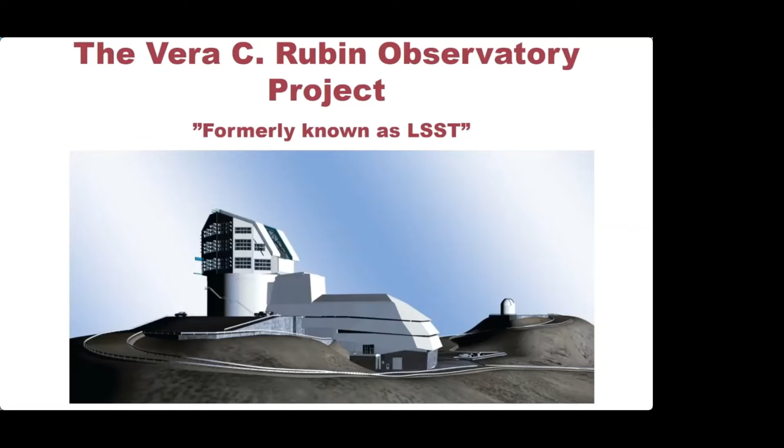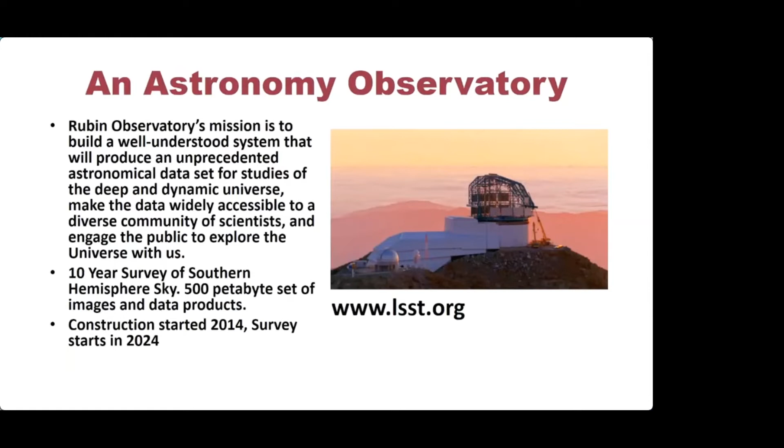We'll start by defining what we call the project, and by that we refer to the full development of the Vera C. Rubin Observatory, previously called the Large Synoptic Survey Telescope. We started just after a compelling question and an idea began to inspire a community of scientists to think about a new observatory, a new system that could address many compelling questions in astrophysics and astronomy. Our mission statement is provided here, but I leave that for you to read later. We began to trade off what was possible, what was desired, dreaming up a system and agreeing on requirements for capability and performance. Basically, we started with a blank mountaintop or blank slate and specified a complete system. We are well on our way to delivering this system, the Rubin Observatory.

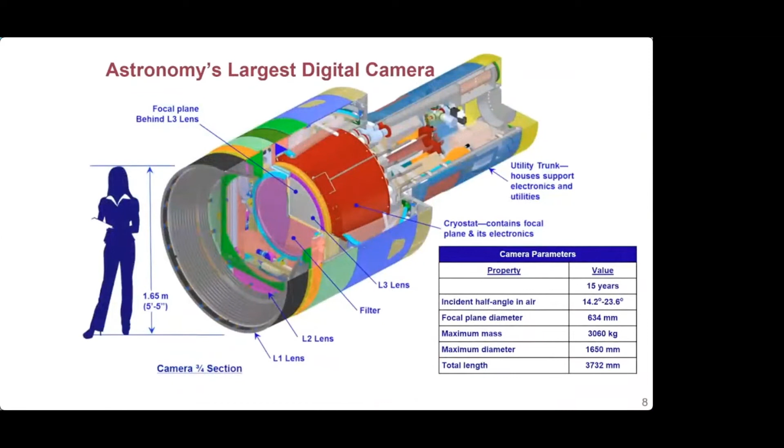This system includes a massive 8-meter class telescope, a support facility on a remote mountaintop, the largest camera ever made for astronomy, weighing in at 3 tons, carrying 5 different filters and having a huge front entrance lens, and featuring a 3.2 gigapixel focal plane at the heart.

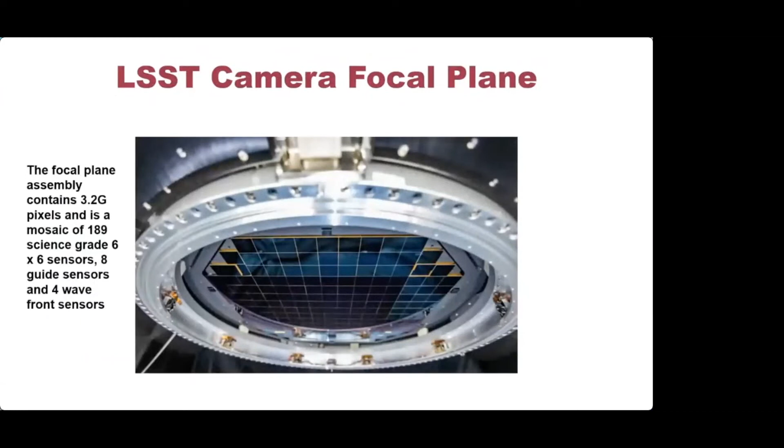Our system also includes a data management system that can take the captured image data from our remote mountaintop in Chile and move it to a data facility where it will be processed, archived, and we can serve those images, alerts, and data products to scientists ready to harvest the database for their specific pursuits.

Finally, the project also includes the development of an education and public outreach system specifically tailored to engage with the global community and share the opportunity for exploration with the public.

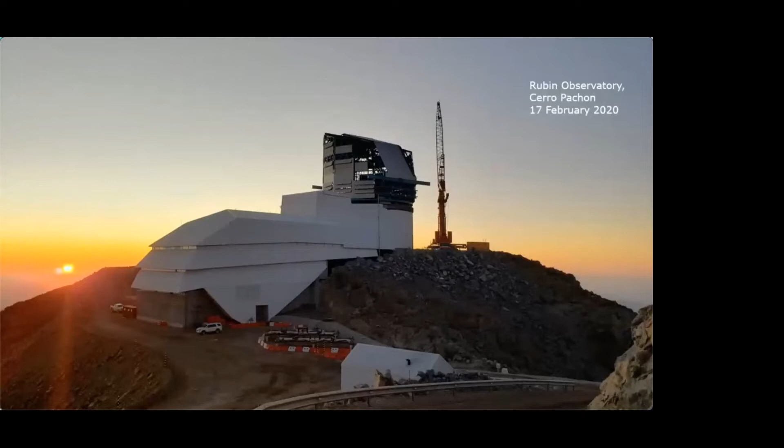You might be thinking we have telescopes already, and even bigger ones planned, and we have some in space that take exquisite data unobstructed by the annoying Earth's atmosphere. But the fact is that ground-based assets are still very viable and far-reaching, and the Rubin Observatory is a world unique in its power and capability.

Designed to take 15-second images of 3.5 degrees of the sky at a time, covering the entire visible sky every few nights, consistently in 6 optical bands, every night for 10 years. The system will alert on anything that changes on minute timescales through image differencing, and will use the 5 million images to produce annual catalogs and a massive 500 petabyte public astronomical database.

So let's look at a few aspects that are key in this project that emphasize a need for formal tooling to support the safe development of the system.

First, it's really about the timescales. The project spent from roughly 2004 to 2014 perfecting the science case and associated designs to establish the project's technical, budget, and schedule details. At every formal review milestone, it was paramount to convey a clear handle on the technical scope, requirements, the programmatic risks, the hazards, and what we had in a plan to execute the project with the highest standard of safety. In 2014, we were authorized to proceed, and we are now well on our way to completing the $750 million project by 2024.

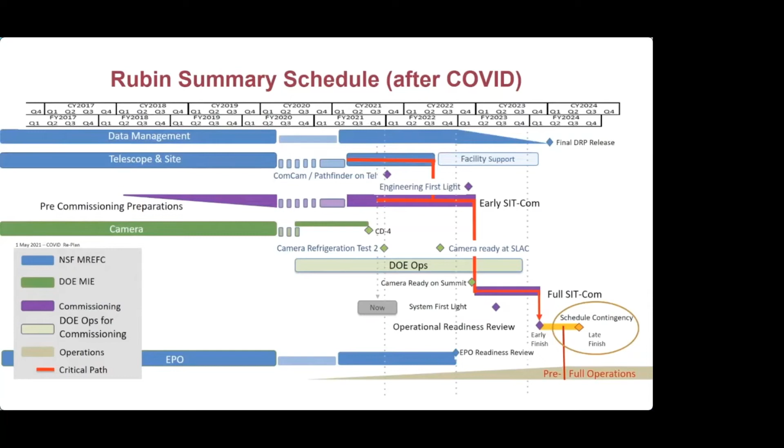Now let's take a real quick look at some of the technical and safety challenges of the project, and this is just a few.

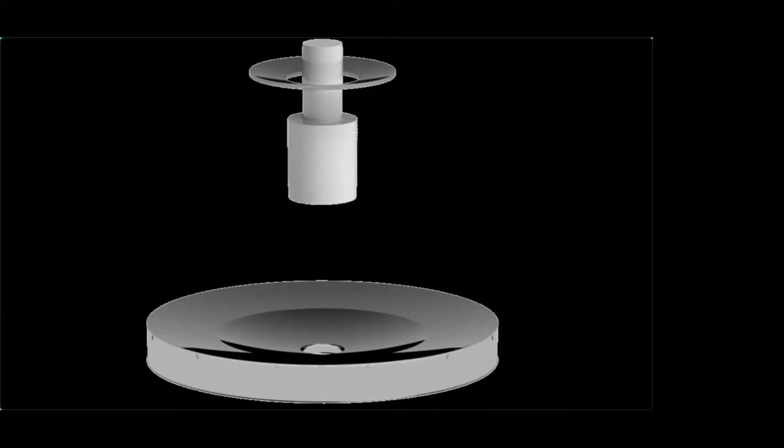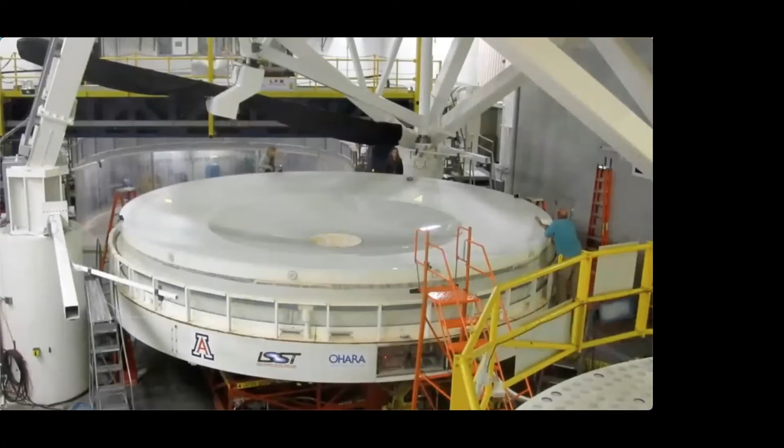The primary and tertiary are fabricated into the same monster piece of glass, shown here at the bottom and shown here again in fabrication. We had to design it for safe operation on the telescope, but we also are responsible for getting it safely from here in Arizona, where it was made, to the mountain in Chile. Many design features are required to handle all of these aspects.

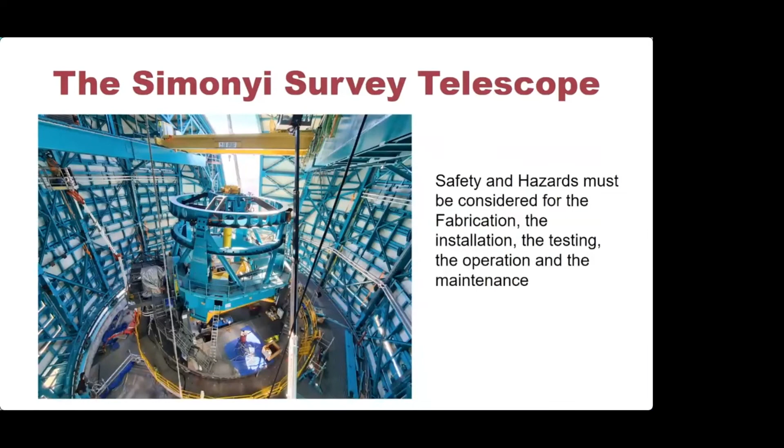The main telescope for the system is a 300-ton telescope mount. This is both the metering structure for the optics and the camera, but also the gimbal responsible for moving the position from position to position on the sky relentlessly. It is massive, fast, and has the capability to cause serious harm in regular operation, in maintenance, and especially now while we are getting the system working.

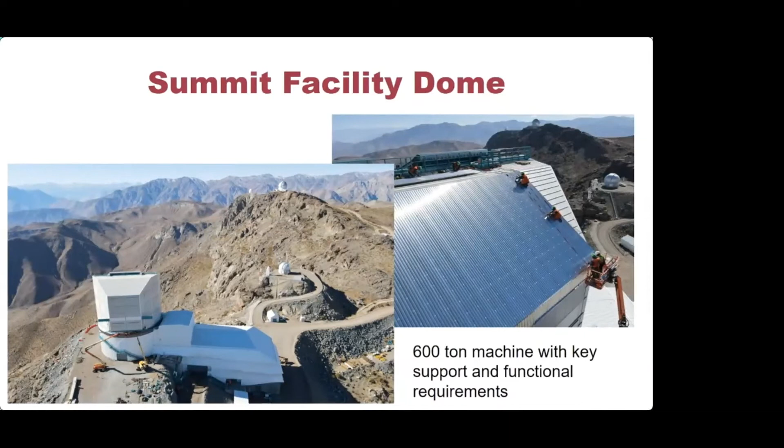The 30,000 square foot building to support the telescope operation, construction, and maintenance on the remote mountaintop is ripe with safety issues and hazards that must be identified early and mitigated early, or there will be limited options later in development and operation. The dome is not just a roof, but a 600-ton machine that rotates, has the main shutter, a moving baffle system to protect unwanted light from entering the shutter opening, has articulating vents for natural air flushing, internal cranes and passageways, ladders, platforms, and a large screen that plays a key role in the constant calibration of the camera and optical system.

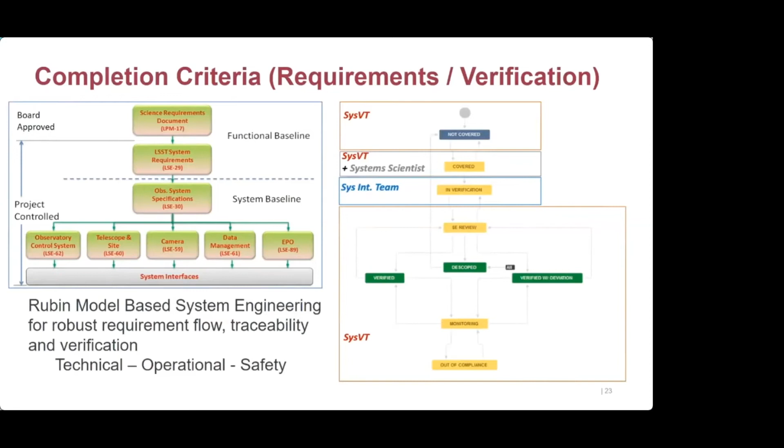I can go on about how robust systems engineering and the safety strategies Chuck will discuss in a moment are key to the success of the project. But let me just point out that projects do not always go according to plan, and all these systems are key to the success of those situations as well.

Finally, the Rubin construction is a complicated enterprise involving several hundred people on the project and several hundred working for contractors that all work together toward a common goal, with the safety of personnel and equipment at the forefront of their activity.

So thanks, Victor. We're going to talk a little bit about safety from this point forward. We planned how we would manage safety in the days of the preliminary design that Victor talked about, and one of the first developments was the hazard analysis process.

Other control measures are not limited to, but these are the major ones: the safety group is part of the senior management team, anyone can stop work if there's a safety concern, and management sets the example for safety performance. Contractors and collaborators are expected to have the same safety systems of control, and we also utilize third-party reviews to help improve our safety performance.

The safety policy recognizes and accepts different safety cultures within the project team, and it also emphasizes that the project has a minimum expectation for all those that work on the project.

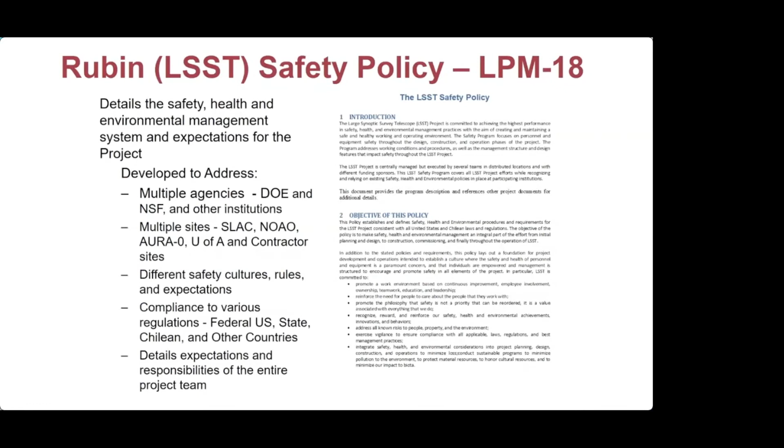The Safety, Health and Environmental Plan is a complicated document, but it's also a compliance document that establishes the minimum expectations for employees, contractors, and collaborators on the construction site. It defines the best practices for things like lockout, tagout, confined space entry, other OSHA requirements, and world-class safety standards.

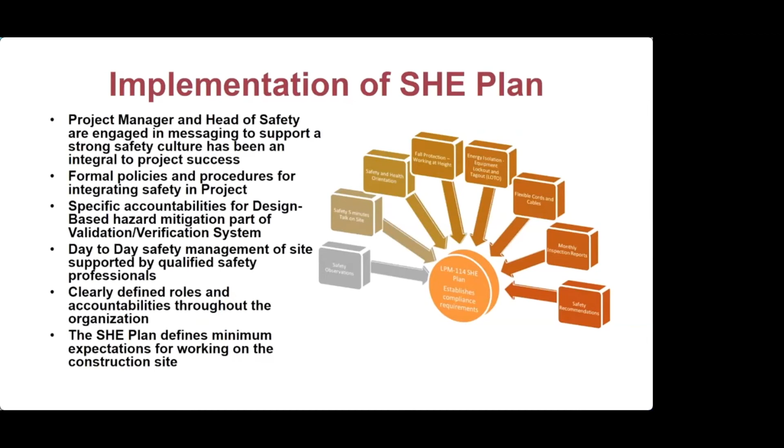This is a complicated project with hazards that needed to be identified and addressed. As a basis for identifying hazards, we used the MIL Standard 882 as our guide. In the early years, we convened engineers from all trades and reviewed preliminary drawings to identify hazards based on our experience of designing and operating telescopes.

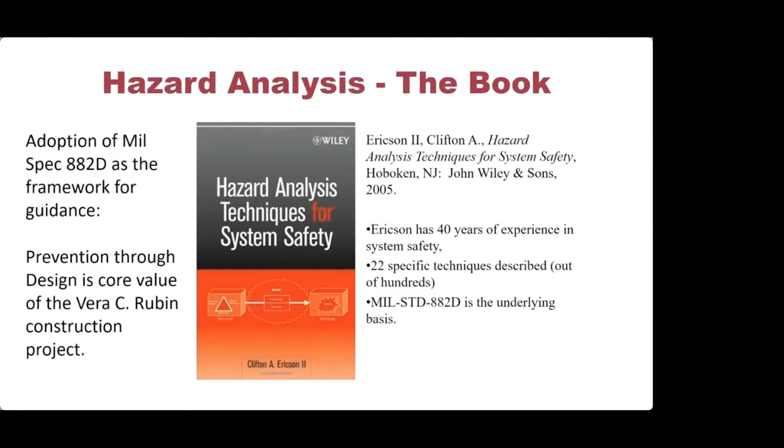As an engineer and a safety professional, I like the hazard analysis process because it allows engineers and designers to get their hands around safety during the design process.

So these are the details about how we are managing the hazard analysis process. It's an iterative process and will continue and be reassessed throughout the project and on into Rubin operations.

When subsystems interface, we collaborate with the subsystems engineers to identify additional hazards. We require this process with all of our contractors, and we expect them to contribute their experience to the hazard analysis process.

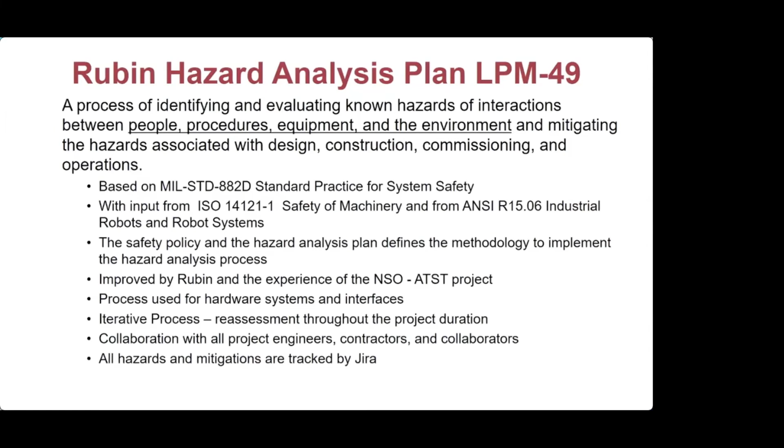So after the hazard is identified, we then determine the probability and severity of the hazard. From these two determinations, we can transfer these assessments to the risk assessment matrix and finally determine the risk level of the hazard.

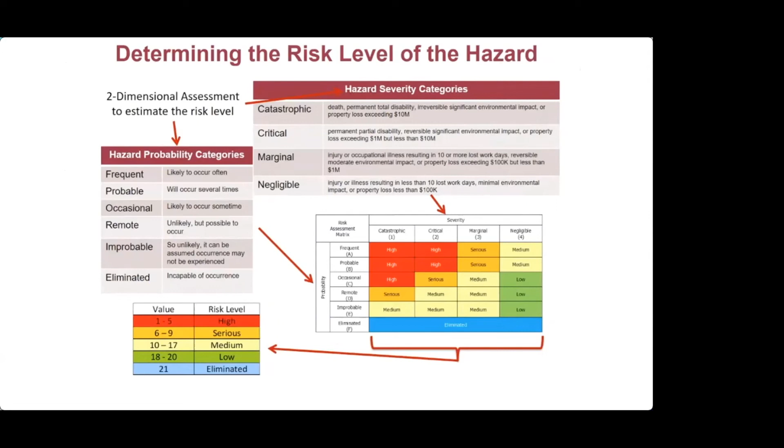At this point in time, we've identified 218 hazards. The interesting thing to me is that 63% of the hazards that can be mitigated or minimized can be minimized by engineering design. Once the hazard has been addressed by the mitigation, or at least minimized, systems engineering identifies the proof of control.

We call them artifacts - they could be photos, design drawings, a test, and/or a procedure. The artifacts are then put into a repository for future proof of verification, and finally a safety professional reevaluates the risk level of the mitigation and presents it to the project manager for acceptance.

Any hazards that have residual risk during the construction project will be turned over to operations management after completion of the project. It's important for the operators to know how to control that particular hazard.

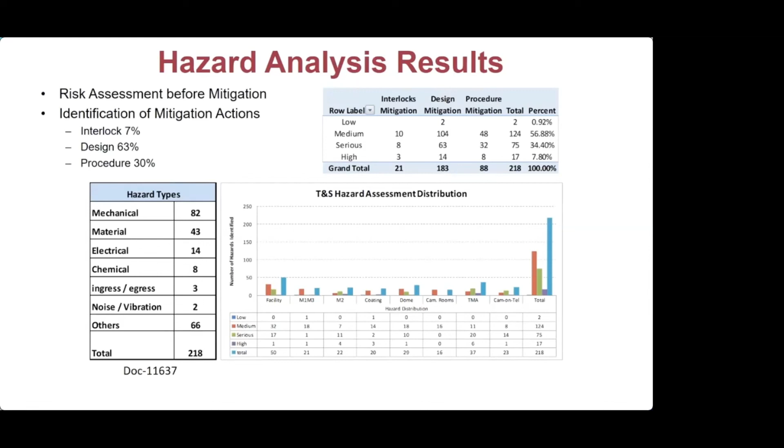This slide depicts some of the high-level safety systems of control for the project. We thought about how we would improve safety and make the design of the observatory as safe as possible for the people during construction and on into operations and maintenance. Prevention by design requires effort and pre-planning way before breaking ground for any project.